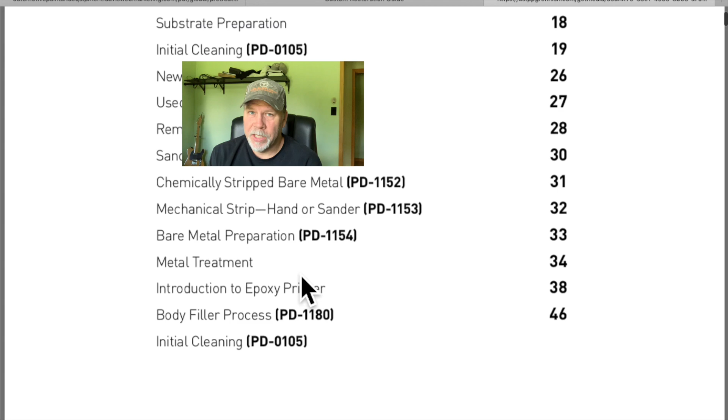All right, so here it is. I downloaded it. I'm gonna try to show you 3 basic things. First, the guide itself, how to get to it, which I already did, and 2 other things. The rest of it, I mean, this is a very in-depth guide. It's got a lot of information. You just have to kind of read through it, and when you get time, see where your project falls into this thing as far as what stage you're at, and see if it won't help answer some questions.

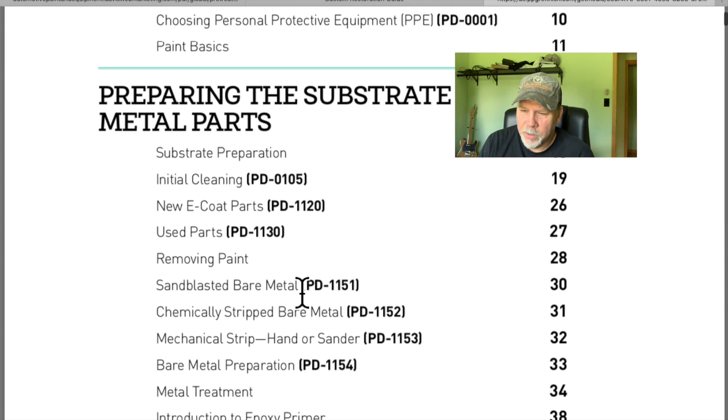So as we go through this guide, it'll give us a table of contents where we can look up the pages in this guide that these processes are on. We're going to skip through this thing. Table of contents, how to use the guide. It's got some information on what these symbols you might see through the guide mean.

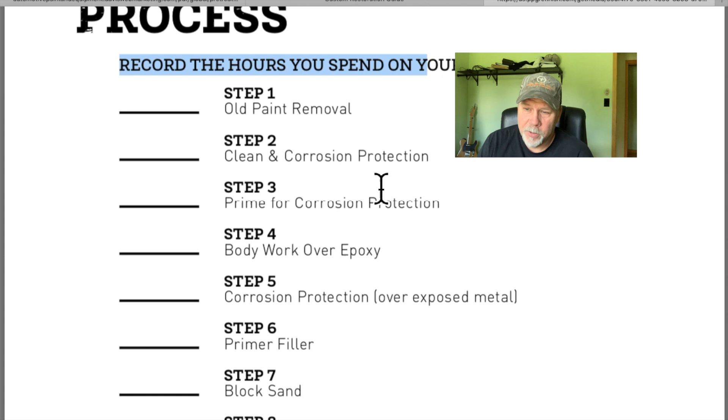Good information. There's a page here for the restoration process where you can keep up with how many hours you spend on each part of your paint job. So that's pretty handy. We'll go on down. Of course, we've got safety. You need to pay attention to all that. Talks about what you're exposed to and how to protect yourself from it. Let's keep going. Paint basics. Gives you the basics of what paint is.

Like I say, this is a lot of information. Won't go over everything because there's just too much there. But I want you to think about the guide itself, know where it's at, how to find it. And here's something you should pay attention to. Okay, this right here: thermoplastic versus thermoset films.

Thermoplastic and thermoset products do not always work well together. If the selected products are not compatible, wrinkling or lifting may occur. This right here is what ruins more paint jobs, when people are not familiar with products and how they interact together. If you look at this, there's a resin rule test. It shows you how to check to see if it's a thermoplastic or thermoset.

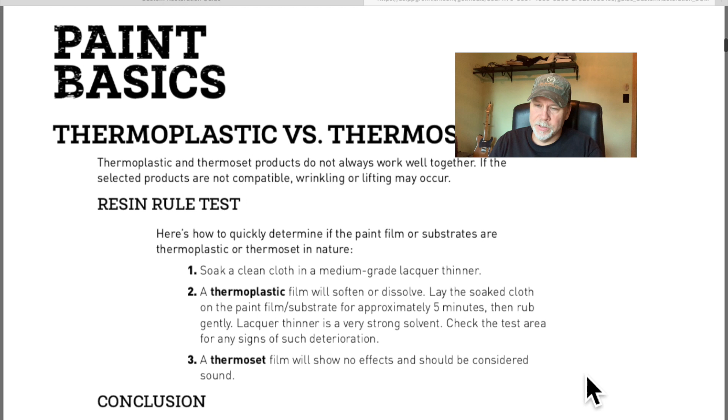If it's thermoplastic, solvent will dissolve that product. It will move it. It soaks up the products and causes lifting. A thermoset film is going to maintain its integrity whether it's exposed to solvents or not. So if you look down at the conclusion, if the film substrate is thermoplastic, strip to bare substrate before proceeding with any repairs.

If you've got a vehicle 1990 or older, it's probably got lacquer on it. Lacquer is a thermoplastic product. These C10s that I work on, they have lacquer on them from the factory. Here's an example of all that. This is off of my C10 that I just jammed the doors out on. Take a look at this. So these doors have non-catalyzed paint on them, lacquer.

One way to check that is take a rag, put some thinner on it, lacquer thinner, and see if it comes off. So it's coming right off with lacquer thinner. So that means it's a non-catalyzed product. So you have to be careful when you paint over that. If you use the wrong product, it'll cause lifting.

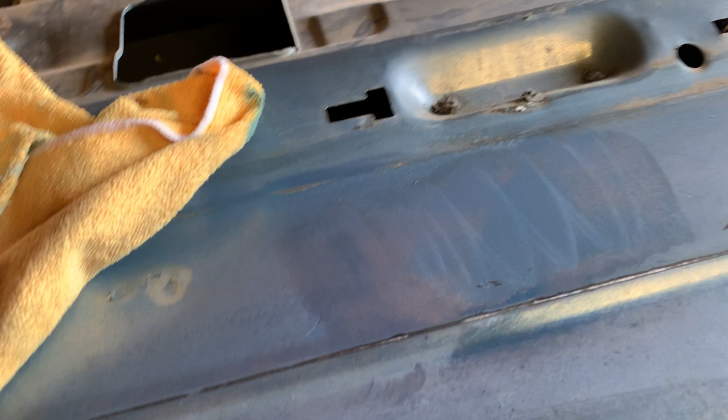See if I can demonstrate lifting right here. Put some lacquer thinner on that. It's almost like putting paint stripper on. You can see. See how it's bubbling up the paint? If that happens when you're painting, it creates a big problem. Look at all that.

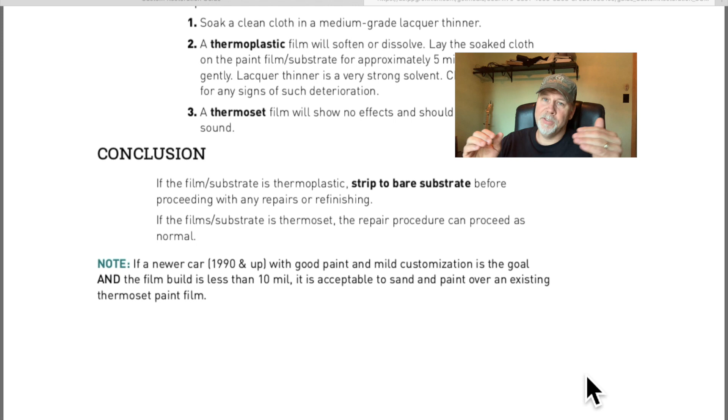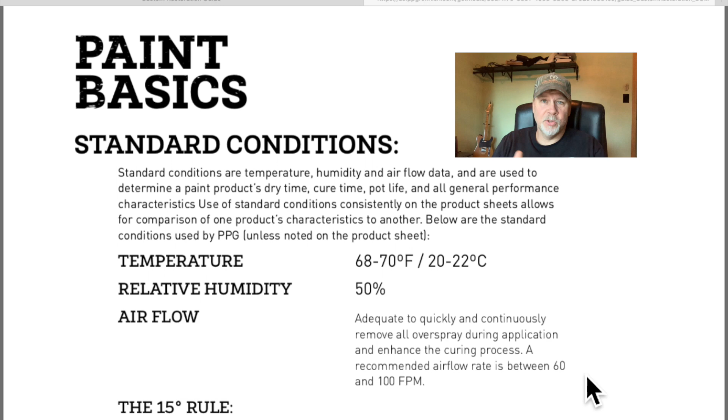Standard conditions. That's the other thing I wanted to talk to you about. When we look at our P-sheets and it tells us it dries in 30 minutes or the flash time is 15 minutes, or it's got all these times set, it's taken into account standard conditions. That being 70 degrees, 50% relative humidity. So if you're working where it's cooler or hotter than that, it's going to affect all your dry times and it's going to affect the product.

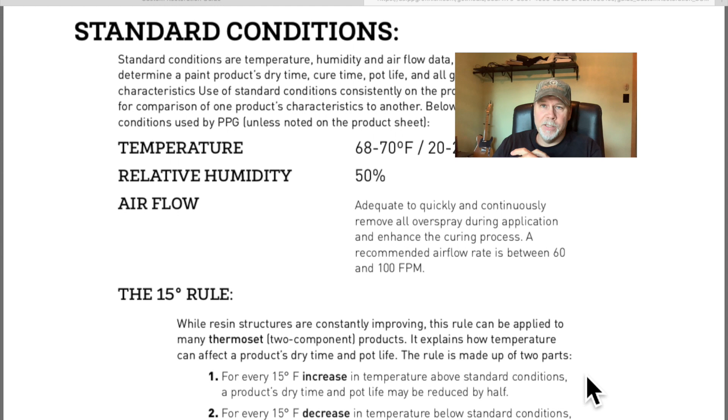So what's the 15-degree rule? It's for every 15 degrees increase in temperature above standard conditions, above 70 degrees, a product's dry time and pot life may be reduced by half. So if you got a product that says it dries in 30 minutes at 70 degrees, well, at 85 degrees, it's gonna dry in 15 minutes. And the same holds true for when you go below that. For every 15 degrees decrease in temperature below standard conditions, a product's dry time and pot life may be doubled.

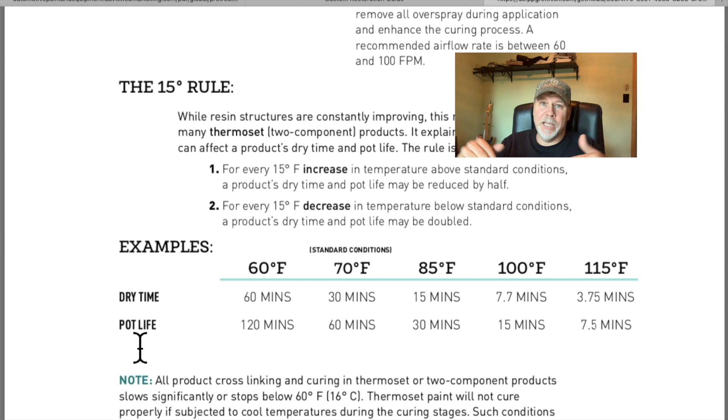This stuff is very important. When you start clear coating cars and it says 15-minute flash time at 70 degrees and it's hotter than that, you might need to get back on it a little quicker than 15 minutes. Or if it's cooler than that, you may have to give it extra time to kick over and tack up before you put the second coat on, or else it might run to the floor on you.

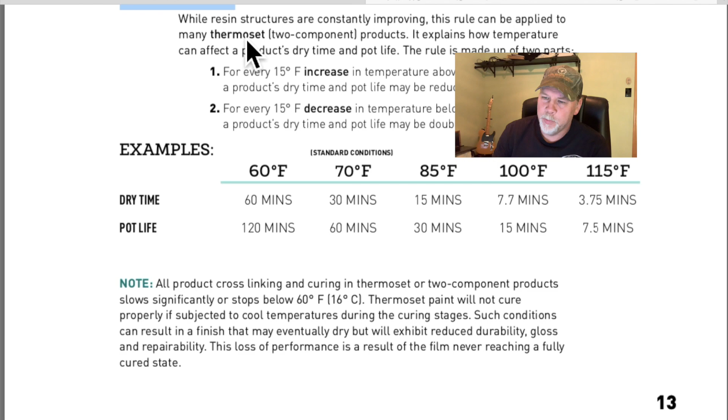All right, so that's two of the things in the guide that I wanted to show you. There's tons of other stuff in here. I mean, lots and lots of information, depending on which way you're going. If you're going to strip to bare metal, what you're painting on top of, it gives you procedures for all that. It's just got a lot of information. So I'm not going to go into that anymore.

I'm going to go to the P-sheets real quick. I'm going to just give you a general overview of what P-sheets are, how they look, and some of the information you can find on the products you use in those P-sheets. Okay, here's a product that I use all the time, VP 2050. Let's pull up the P-sheet on that, and it'll give you a basic overview of how they're structured. Most of the sheets are very similar in the way they're arranged. So let's pull that up.

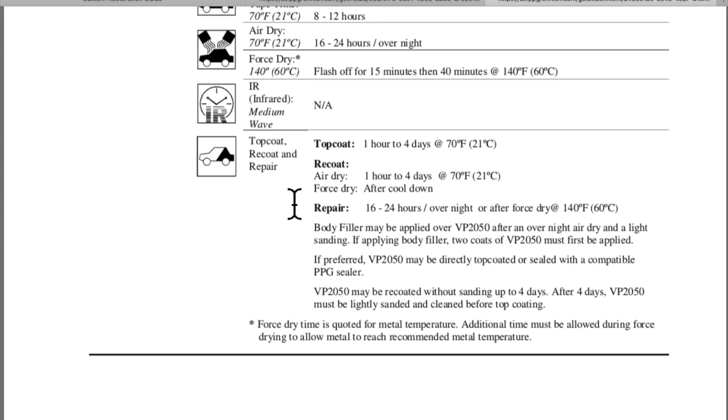Now, let's go to a different product. We'll go to DPLF, and that's going to give us a lot of information. It's a P-sheet that has a lot of information there. So let's take a look at that one and see how it compares to this simple P-sheet that we just looked at. Let's see, DPLF, epoxy. Saying tech sheet, let's pull that up and see what we get. Let's go with this top one, see if it pulls up our P-sheet.

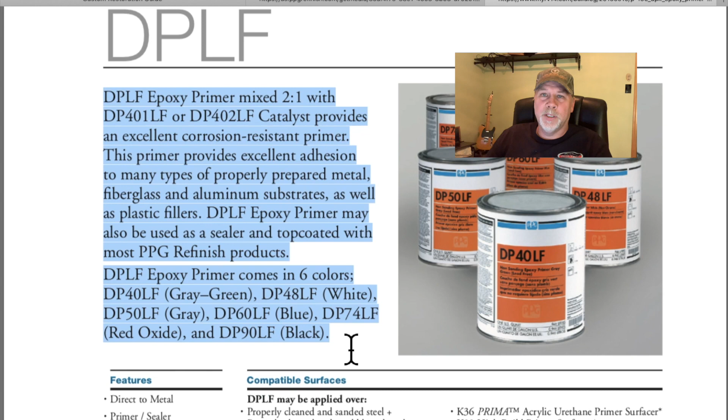There it is. So DPLF, epoxy primer, same basic structure of the P-sheet itself. So the first part just gives you an overview of the product and what it's intended to be used for. As we go down, it's going to tell us the features of the product, the advantages, benefits, and there we go again, compatible surfaces. It tells you all these surfaces you can put it over. Now that's a long list of things you can put this over. So it's a lot more detailed. So you got to pay attention to all these little footnotes.

Anyway, that's all for this episode. Know your P-sheets for the products that you're going to be using, and that way you stay out of trouble and you get the final result that you want in the end. You get that awesome paint job that you worked so hard to accomplish.